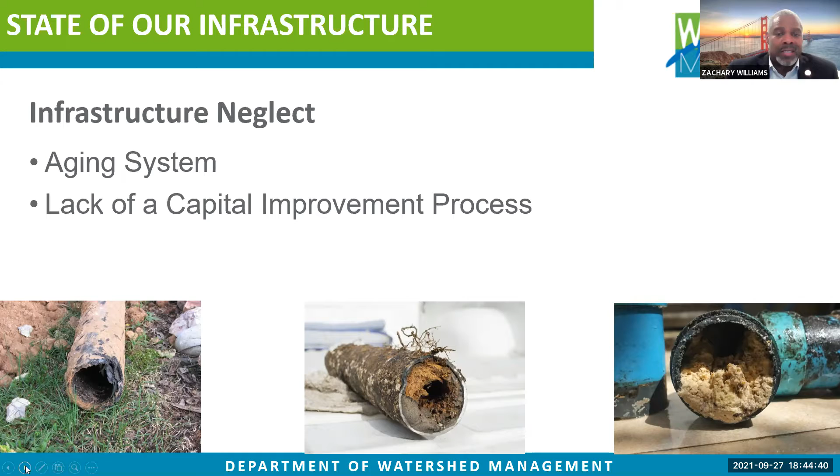We're coming up on our 200-year anniversary, and the population going from zero up to in excess of 700,000. Now, the latest census, I believe, has us about 770,000. But you see these periods of rapid growth that were enabled in large part by the formation of the Department of Watershed Management.

Mr. Scott Candler, in fact, was an original leader in the formation of the county through his vision in the development and implementation of the water system.

But over time, what you see happened in DeKalb County is what happened, or didn't happen, throughout the nation, quite frankly. As the population grew and the demands grew, the investment didn't grow. It was not commensurate with the need.

So what you have, really beginning in the 1980s primarily, is this accelerated growth in population and aging pipes. At that point, a lot of the systems were 30, 40, and some 50 years old already and should have been replaced.

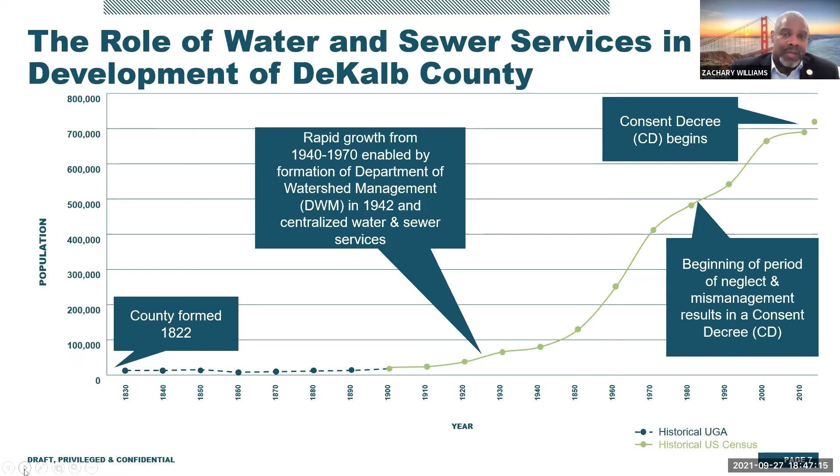And so with that, the county began efforts to invest over $1.3 billion in an original consent decree beginning around 2011. Unfortunately, that progress, that project overall was delayed, and it was mired in a lot of the issues that DeKalb County had faced for probably decades, but certainly during that time period.

And those issues were ongoing political interference, lack of appropriate oversight because of instability in the watershed director position. Then you had ongoing allegations of corruption and favoritism that culminated in a grand jury report that began in 2008, I believe issued around 2011. Issue after issue showed DeKalb County's inability to focus on what's important, what the citizens elected and appointed people for.

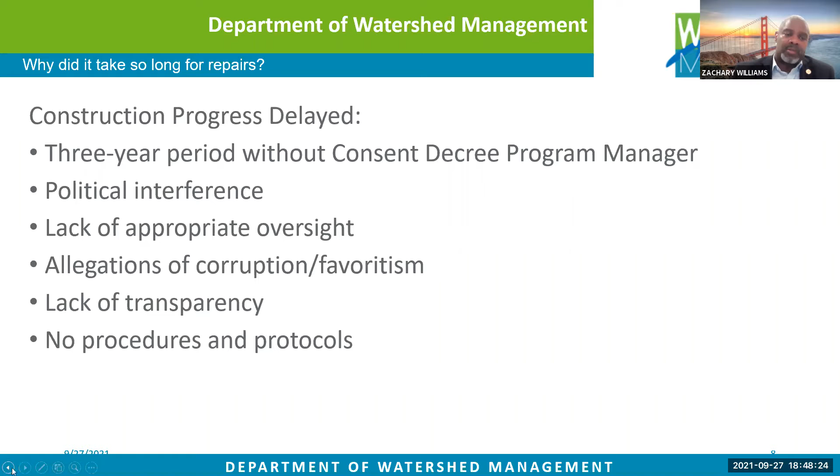Overall, we just weren't getting our money's worth. And we lacked transparency. A lot of this was behind the scenes, not getting things done, and lack of procedures and protocols. So what changed?

In fall of 2016, November 2016, CEO Michael Thurmond was elected. And the CEO has established a well-deserved reputation as being a turnaround agent or a change agent, which is what he had done with the Department of Labor, what he did with the DeKalb County School Board to assist them in getting their accreditation back after they had lost it. And he implemented the same strategies and focus here in DeKalb County.

And he insisted that we focus and work collectively to address these issues, because it matters not to the citizen who wants to blame whom. Simply put, residents pay their water bill and they expect clean, safe drinking water, and they expect not to have sewer overflows. It's a simple covenant that we needed to honor.

So what the CEO did is convene a team of leaders from throughout the county, ensure that we focused on identifying the root underlying issues to symptomatic problems in the sewer system. And it wasn't simple. We had to be willing to unpeel the onion, recognize what things needed to be done better, faster, more transparently. That was part of the process that led us to changing, in some ways, the focus from focusing only on fats, oils, and grease, but focusing also on repeat wet weather spills. And that's what has brought us here to this discussion today.

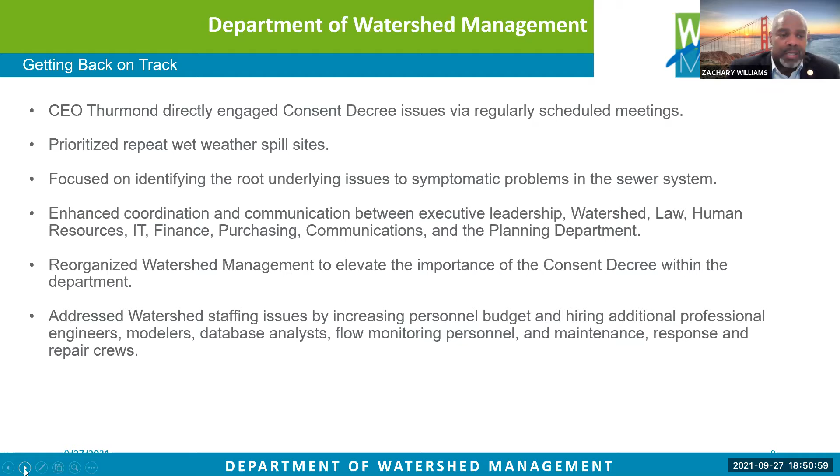So with that being said, what I'd like to do is have Mr. David Hayes, our Director of Watershed Management, give an overview of our system, who Watershed Management is, and then members of his team will take us into specific details as to how we will execute this project. Mr. Hayes?

Sorry about that. Thank you, COO Williams. As you said, my name is David Hayes. I am the Interim Director of Watershed Management, and my primary role is to facilitate the day-to-day operations of Watershed, to coordinate the many activities that we have going on, and to provide the things that the department needs to be successful.

What do we do in Watershed? We service approximately 700,000 DeKalb County residents. We are allowed to take as much as 128 million gallons per day of water from the Chattahoochee River to treat for drinking. We currently average 70 million gallons per day of drinking water to DeKalb County homes and businesses. We have the ability to receive and treat 56 million gallons of sewer from homes and businesses of DeKalb County. All water and sewer is conveyed using DeKalb County's 5,000 miles of water and sewer pipe in the grounds around and throughout DeKalb.

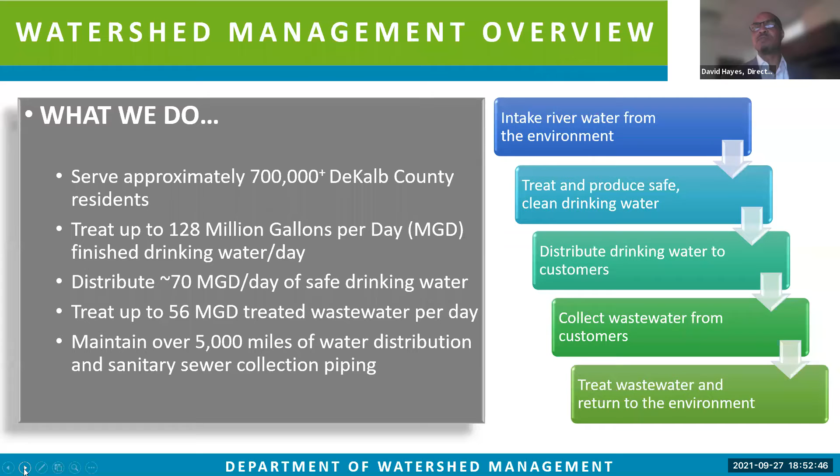If extended, pipe to pipe, this is enough pipe to extend from Georgia to California and back again.

Most homes and businesses are connected to the DeKalb County system with a pipe that is referred to as a lateral. On the DeKalb County side of the connection is the gravity sewer, which allows sewer to flow under gravity power to a wastewater treatment facility for treatment.

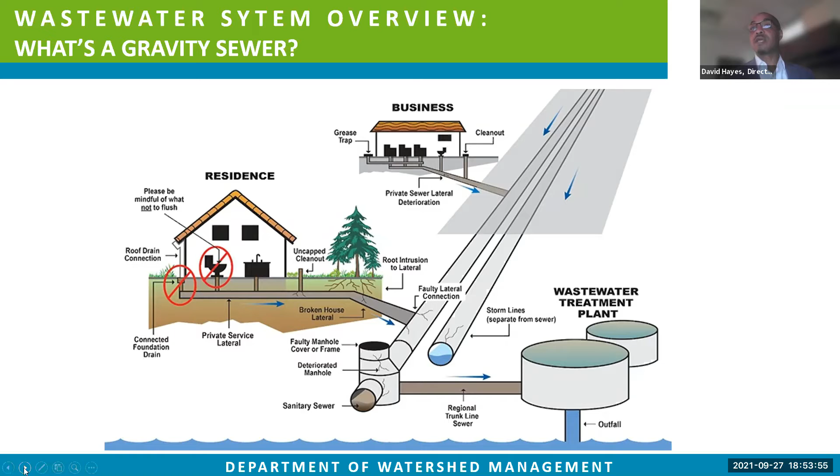Older laterals may crack, break, have missing caps, illicit rain gutter connections, root intrusion, and fats, oils, and grease can build up in them. They may even be damaged from contractors and construction. These issues allow unwanted rainwater to enter our sewer system, taking up much needed capacity, and also allow blockages that prevent the flow of sewer. These blockages and capacity issues are some of the things this project will correct.

Why is DeKalb replacing and repairing sewer lines again? The engineering department is leading the effort to repair and replace the county's aging infrastructure. These repairs will reduce sewer overflows and improve customer service, yielding an upgraded system that will allow future development and growth for DeKalb.

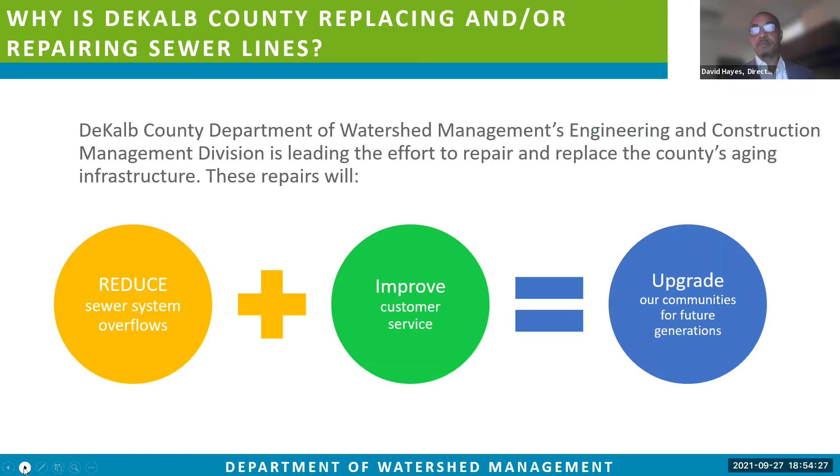By direction of the CEO, we have dedicated a full team to this project to include every needed resource, not just from the watershed, but from all other DeKalb County departments as well, and several industry-leading engineering and construction firms who will be led by the Watershed's engineering department. This will allow a timely, safe, and successful project.

The next speakers you will hear from today are Assistant Director of Compliance, Mr. Brent Zern, who will talk about our systems assessment, and then you'll hear from the Engineering Manager, Kerry Williams, who will speak on the problems. Mr. Zern.

Thank you, Director Hayes, and thank you everybody for joining us tonight. We're glad you're here. As stated, my name is Brent Zern. I am the Assistant Director over Regulatory Compliance and Consent Decree Operations here in Watershed.

As part of that, I lead a team of very talented and dedicated professionals who probably start up this whole process of understanding why we have repeat SSOs and assessing the system to figure out what data needs to be collected, evaluated, and sent on to our other teams for implementation.

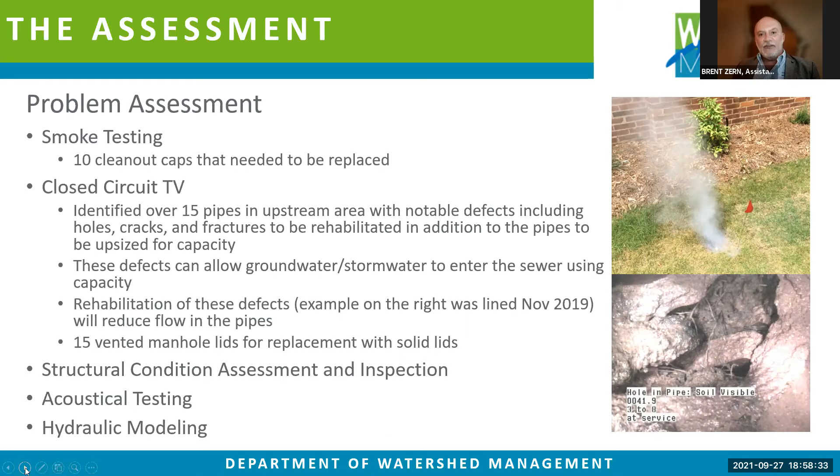But we provide recommendations that are sent on further for evaluation by Mr. Kerry Williams and his team. And so Kerry will speak next.

Good evening. My name is Kerry Williams. I am a licensed professional civil engineer and engineering manager for the DeKalb County Watershed. I oversee a very dedicated team of 13 engineers, 6 of which are licensed. We are supported by 4 nationally known consulting engineering firms.

And so what's the problem? The problem in the Tilly Mill area. Since 2017, there have been 10 sanitary sewer overflows in the Tilly Mill area, accounting for 450,000 gallons of sewage spilled into our waterways. The most recent being May 3rd, 2021.

So what's the cause of it? I think earlier you heard Chief Operations Officer Zach Williams speak about our aged infrastructure. A lot of infrastructure in the Tilly Mill area was installed around the 1950s, making it roughly 70 plus years old. And with age comes problems. We don't usually think about sewer pipe because it's out of sight, out of mind. But in time, the director spoke about the cracks that develop there and other abnormalities that we get in our infrastructure as it ages.

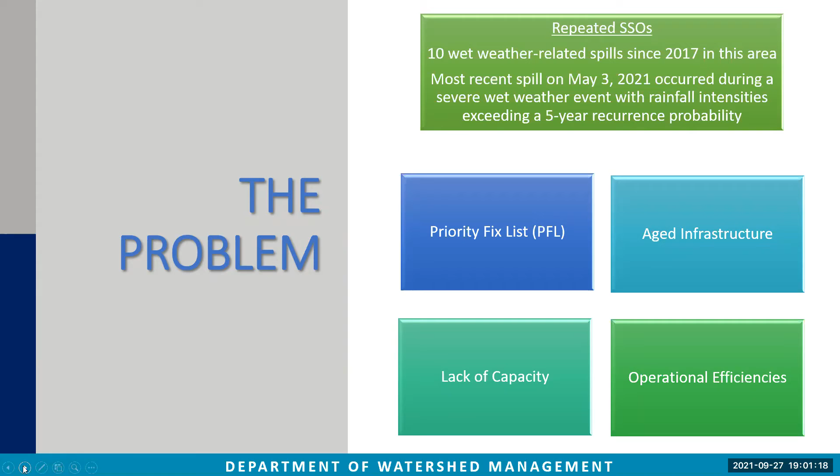So a lot of things contribute to a failure of our sewer system that we're working to fix. This is, as Ms. Hauser told you, a priority fix list under the consent decree program, and we will address these issues through this project. You'll hear more about this project from the PM, Ms. Shawna Prescott, later. But now I'm going to turn this over to the program administrator, Ms. Cassandra Marshall, to tell you more about the solution to these problems.

Good evening, my name is Cassandra Marshall. I'm the CIP program administrator for Watershed Management. To this point of the presentation, you've heard about the problem - I will speak to the solution. You may ask yourself, what does CIP stand for? Well, CIP, or Capital Improvement Project, is a project that helps maintain or improve an asset. It can either be new construction, an expansion, renovation, or replacement of existing infrastructure.

Earlier this year, the Board of Commissioners approved a new CIP program for $2.4 billion for projects to be completed from 2021 to 2030. The department is grateful to Commissioner Patrick, who sits on the PWI committee and is partly responsible for the approval of the CIP plan. Thank you, Commissioner Patrick. The Tilly Mill Sewer Improvement Project is a $3.1 million project that is included within that CIP plan. My team, the CIP team, is responsible for getting the CIP work done.

My team includes 4 DWM construction managers and 12 licensed inspectors. Later in the presentation, you will also hear from DWM construction manager for this project, Mr. Ari Kennedy, who is a licensed utility manager. Along with in-house staff, we are supported by consulting firms who help assist the county with construction management and inspection services.

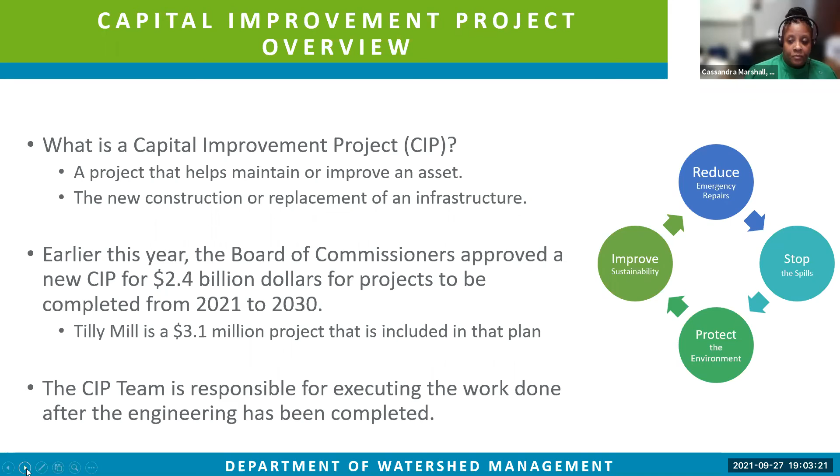This area is a prone SSO site, but we want you to know the county has completed some immediate repairs to the system. In phase 1, the following repairs were completed: we've done some manhole rehabilitation work. There were 13 manholes identified with I&I issues, and 11 of the 13 manholes were perforated lids. The county changed out those lids to solid covers to reduce stormwater intake into the system.

There were 2 manholes below grade, which were raised above ground level. We've done a point repair to 1 pipe segment. We've lined 1,150 linear feet of sewer, and we've replaced 145 linear feet of pipe.

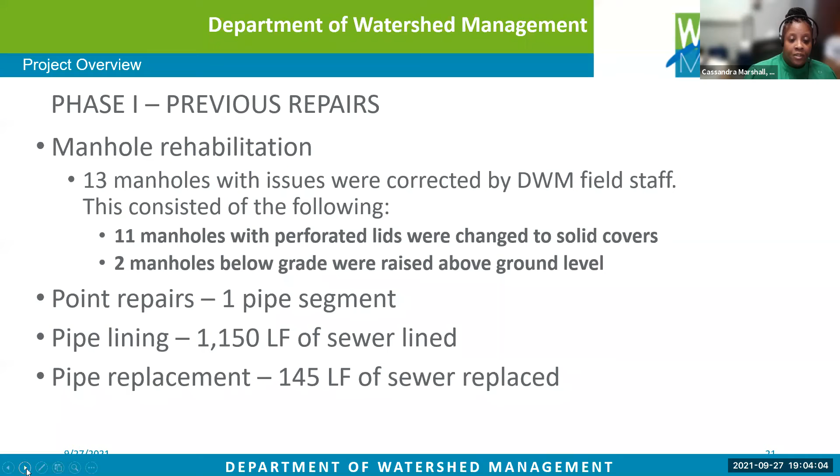Next, you will hear from the project manager, Ms. Shawna Prescott.

Good evening, everyone, and thank you all for joining us. My name is Shawna Prescott. I'm the project manager for the Tilly Mill Realignment Project. This evening, I will be providing you with the scope overview for this project.

From 2016 to December of 2020, we have completed the survey and assessment work, reviewed all ecological impacts to the area, and completed the proposed design and permitting for this project. In Fall 2021, we will start with project preparation by engaging the public. Construction will begin, and once installation is finished, restoration will commence.

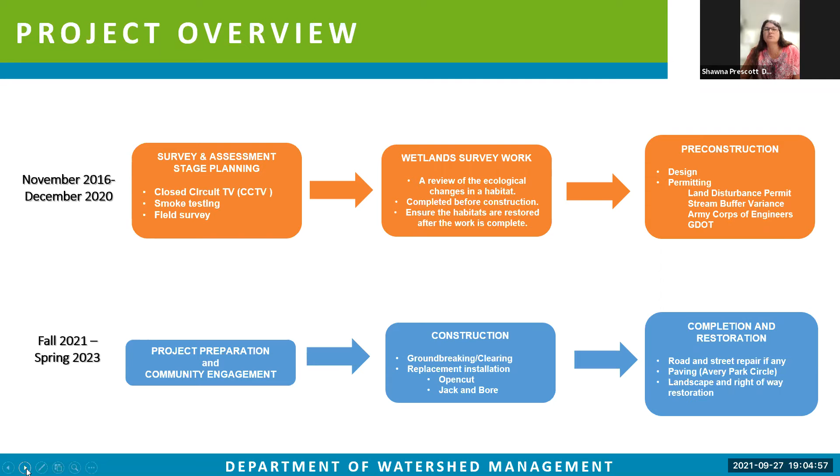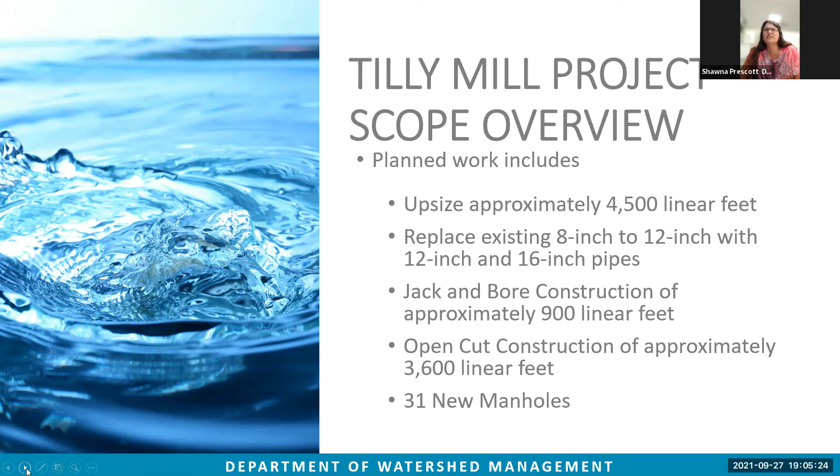Planned work includes upsizing approximately 4,500 linear feet, replacing existing 8 to 12 inch pipe with new proposed 12 to 16 inch pipe, jack and bore construction of approximately 900 linear feet, open cut construction of approximately 3,600 linear feet, and installation of 31 new manholes.

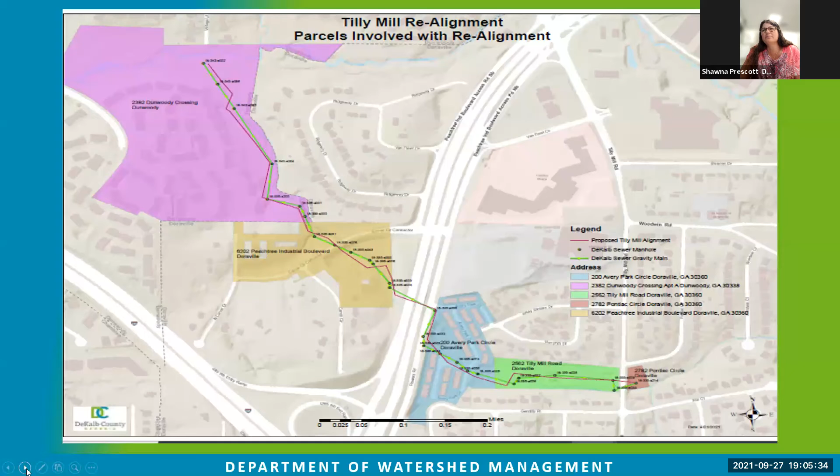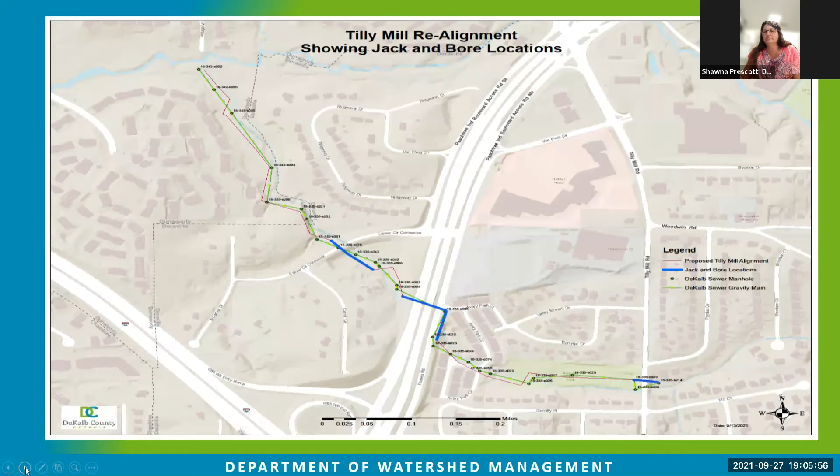Methods of construction. We have chosen two types of construction methods for this particular project. Jack and Bore, a trenchless method of sewer construction: dig a receiving pit and a launch pit, place the Jack and Bore machine in the sending pit. It'll cut a hole horizontally to the receiving pit without disturbing the surface above.

Open cut trench excavation is the traditional method of sewer construction, repair or replacement. It's the most economical method of construction to achieve the county's desired results for gravity sewer, and provides the best service suited for the scope of this project.

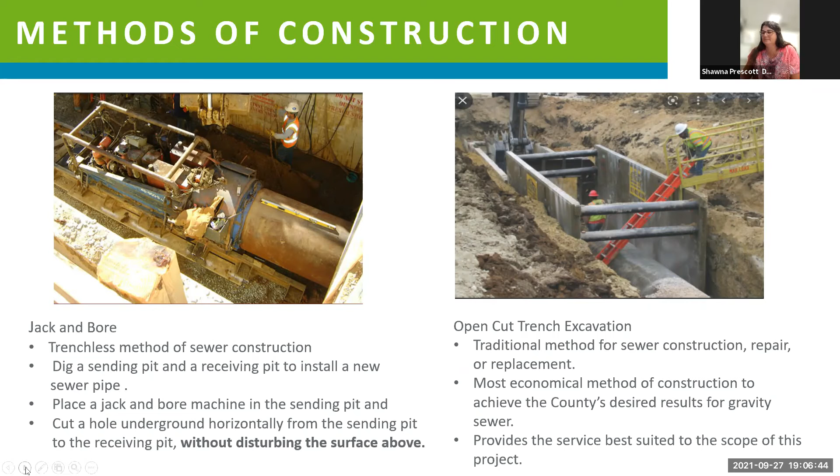Duration of the project. The staking of the limits of disturbance has begun. Easement clearing will start October 4th and continue throughout the life of the project. Construction access preparation will start around October 7th.

Construction will commence on or around October 13th in the fourth quarter of 2021, working from the downstream area, beginning at Vintage Lane, continuing upstream to the final tie-in of the project. Some work activities will continue throughout the spring of 2023. All dates are dependent on weather and site conditions.

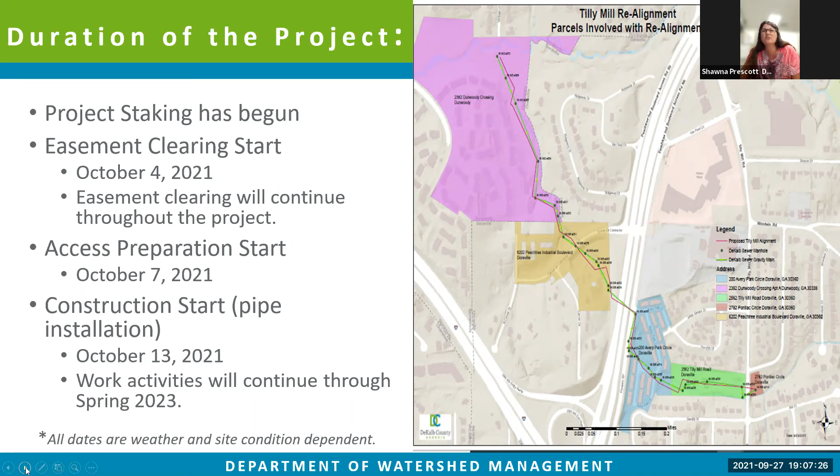Residential impact: some residents may be prevented from parking in their normal parking spaces on Avery Park Circle during construction activities. Residents will be notified at least 3 days in advance. We are working with the HOA to assign alternate parking locations.

Traffic flow will likely be diverted during work hours, but will be restored in the evening. Residents and visitors may need to use alternate parking for a short term.

At Bernard Halpern Park, DWM has explored every possible option of relocating the existing sewer line from under the basketball and soccer courts to minimize the disruption to park activities.

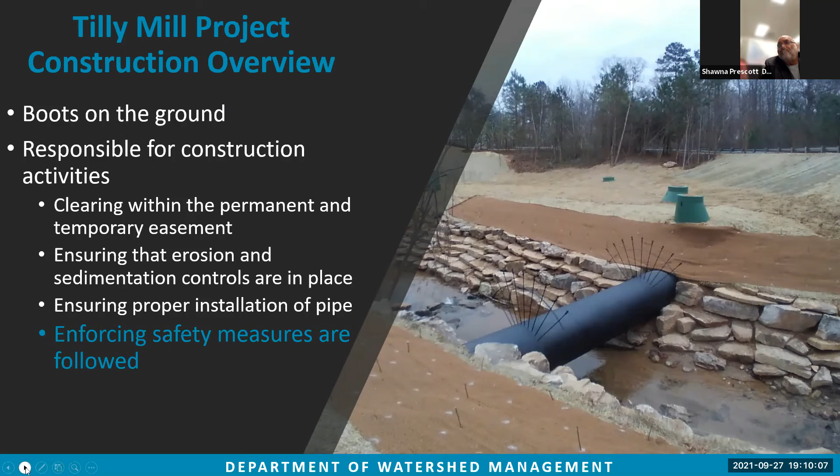The picture on the right shows how your property will be restored in kind and or better.

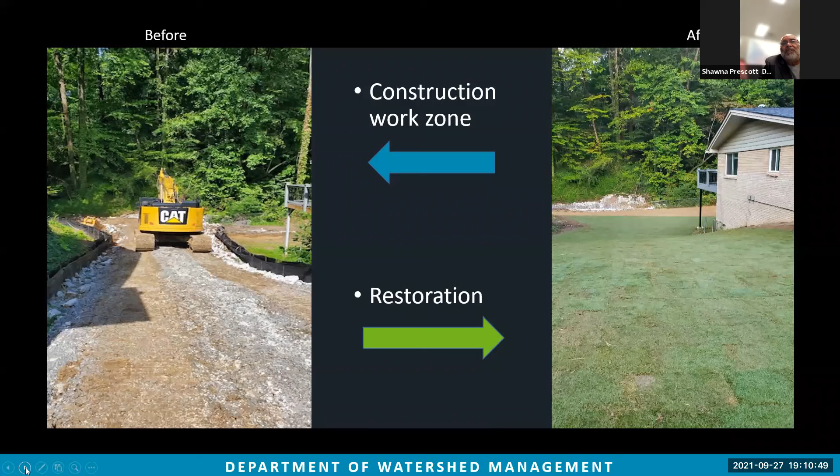All right, as Ari stated, I will now address the community concerns. So what to expect? Unfortunately, what comes with construction are inconveniences which we plan to try to minimize. What you're going to see is a lot of construction traffic, foot and vehicles. There will be construction workers, surveyors, and county employees throughout your community.

What also comes with this is parking for the crew workers. They will be parked along the streets, in your neighborhoods, and sometimes along the work zone. There will be material and equipment deliveries by means of large tractor trailers.

The crews and flaggers will guide these large vehicles in and out of the communities. As an FYI, all of the county contractors and county employees will have an identification badge.

There's going to be noise. The equipment has backup alarms. The alarm has to be loud enough for the people in the work zone to hear. This is a safety mechanism. As one measure of noise reduction, we will not have equipment sitting running idle.

Bypass pumps will generate noise also. This photo to the left is an actual setup of a bypass pump system. The good news for this project is there will not be continuous bypass pumping since most of this project is a relocation of the existing sewer. This allows for the existing system to naturally flow, and bypass will only be required when we have to tie in spur lines.

Sediments on the street. As an erosion control measure, the contractor will first install construction exit and entrances prior to starting activities. This will reduce tracking of mud on the streets, but not fully eliminate the issue. If mud is tracked on the street, the contractor will be responsible for keeping the streets clean and swept daily.

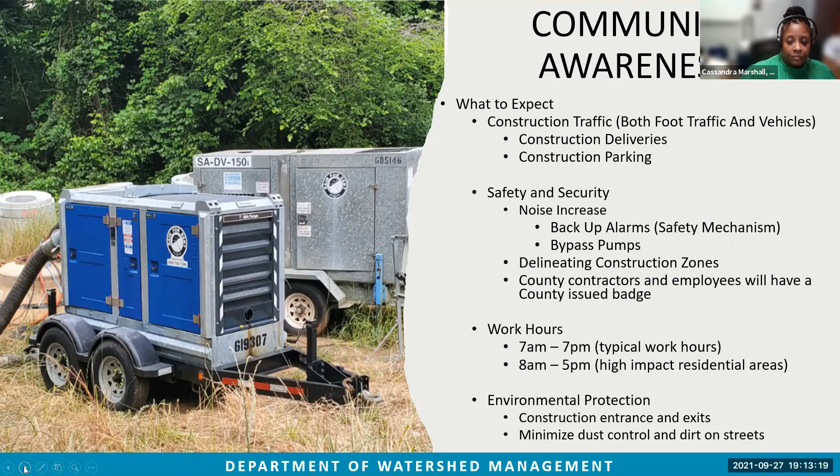Next, you will hear from Public Relations Manager, Ms. Alicia Penny.

Thank you, Ms. Marshall. Good evening, everyone. My name is Alicia Penny, and I am the Public Relations Manager responsible for communications and outreach for the department. Tonight, I will share with you the methods DWM will utilize to communicate with you about this project. But before I do that, I want to briefly recap what has occurred so far within the community.

Our outreach team has engaged with residents in high impact areas, for instance, the Avery Park Homeowners Association, Dunwoody Crossing Apartments project manager, and the developer for the Carver community. Our construction and engineering teams have also worked with residents to obtain right of entry access to their properties as well, to support the community.

Leading up to tonight's meeting, you received a notification letter describing the details of the project and informing you of tonight's meeting. Going forward, 48 to 72 hours before the beginning of construction, each homeowner will receive a door hanger like the one shown here, which will tell you the hours of work and what to expect during construction.